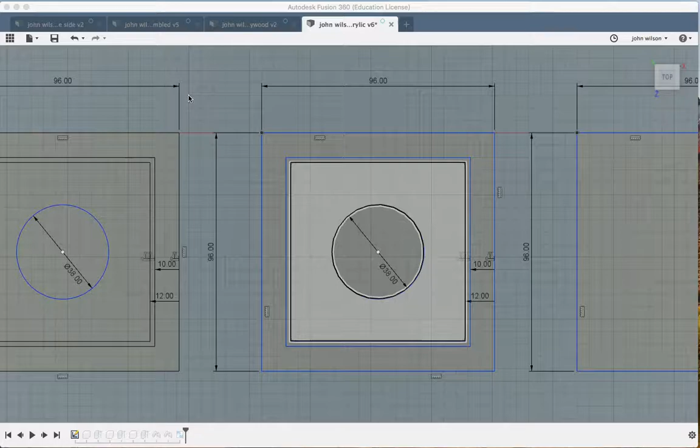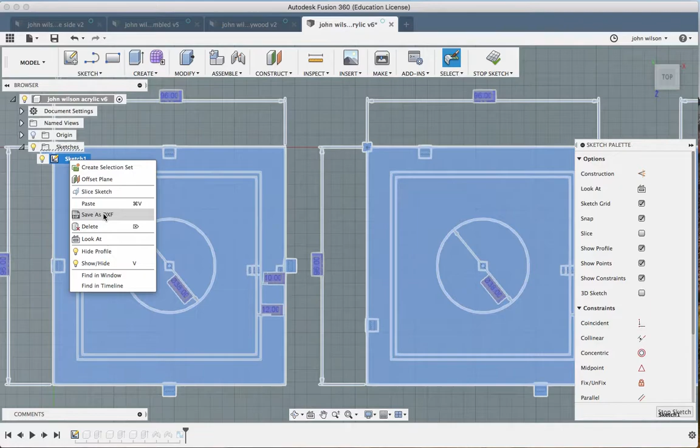Okay, so in this video, we're not going to be looking so much at how to represent your ideas, more how to draw parts for manufacturing. So in the same way as this drawing here that we created for your base, we could right-click on Sketch 1, save as a DXF, and export that to the laser cutter to cut out the acrylic pieces. We're going to do something similar for the polypropylene.

Now, the one thing that's going to be really important for you to understand or check on your drawing is what these dimensions here are. We talked earlier on and we said, well, that one was 72 and this one was also 72, I think, in this case. But obviously, it's going to vary where you've actually made your product. Yours may be larger, it may be smaller, and it may not even be square, of course.

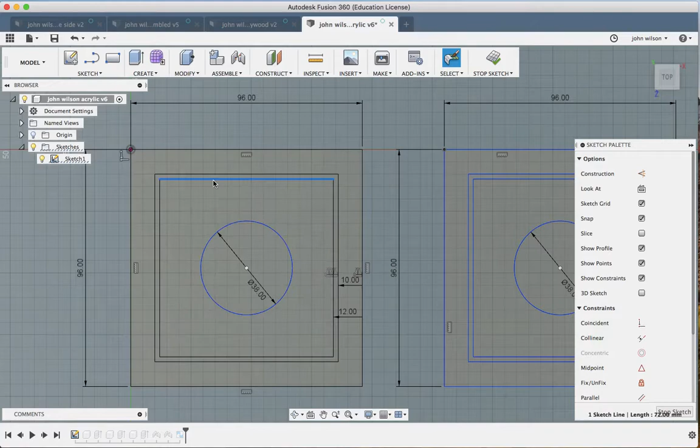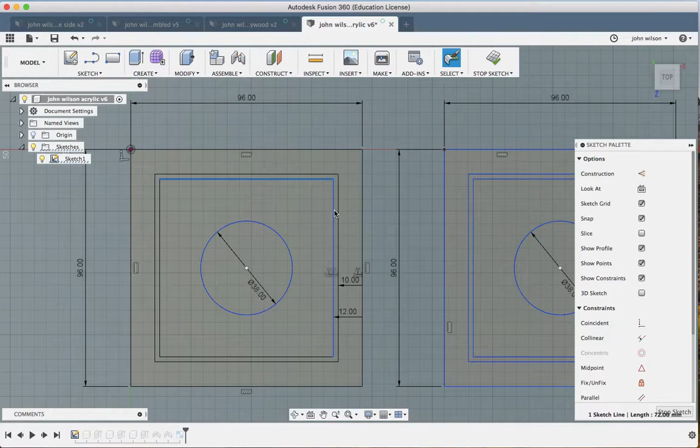You might have a measurement where this is 72 and this one is, I don't know, 82, let's say, for argument's sake. So you've got a rectangle, but you've got one side 72, 82, 72, 82. We'll use those sizes and we'll work with that as we do the next part. So let's assume it's not square. You've measured your pieces, you've measured this inside piece, and you've got 72 across here, and you've got 82 here.

Now, if that's 72, we've already said that's 76. If that's 82, that's 86. So we're going to find the midpoint between those. Well, the midpoint between 82 and 86 is 84, and the midpoint between 72 and 76 is 74. So when we go to draw our polypropylene, I'm going to do 74, then 84, then 74, then 84.

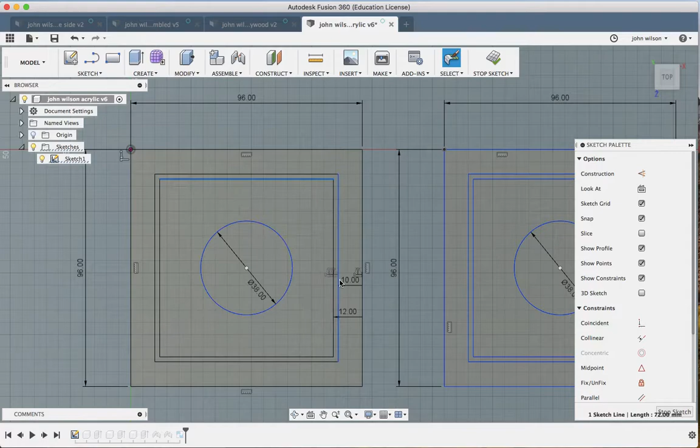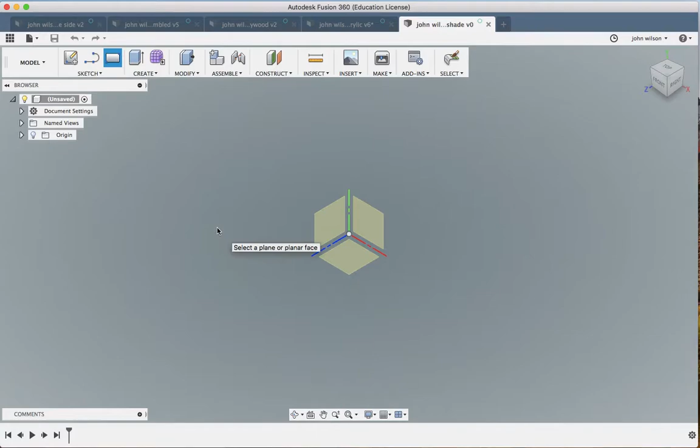Okay, so we're going to create a new drawing. We're going to come up to here and we're going to save it, and we're going to call this John Wilson polypropylene shade, and make sure we're going into a known place. Click save. So again, it's a rectangle essentially that we're starting with if it's a square shape. So I'm going to click on one of these faces. Again, I'm going to go for the plan view.

And we just said we were going to do 74 on one side and 84 on the other. So as I drag this out, this blue box is asking for the height, which is 90. Press tab, and the next blue box is asking for the width, which is going to be 74. Click 74 and boom, there we go.

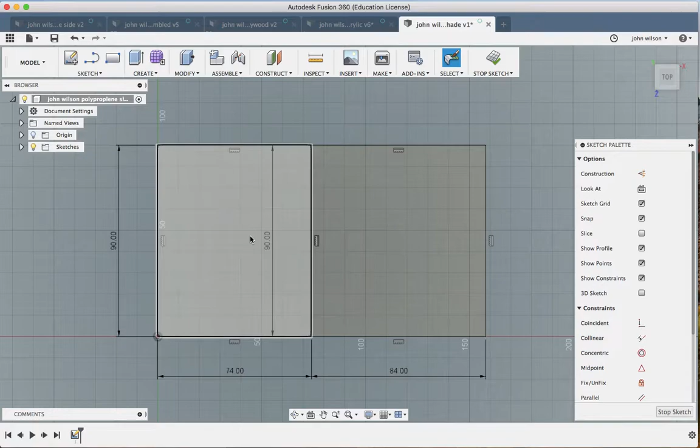When we then go to do the next piece, we're going to start with another rectangle, and this time as we pull it out, it's going to be 90, same height, they're always going to be 90 high. Tab, 84. Okay, so we said let's assume in this case it's not a square, so it's 74, 84, 74, 84 as it works its way across. So there's our first two panels.

Now, when you move on from this, obviously you've got to think about how you want it to look. So you can do a whole range of things here. I'm going to do something very, very simple. I'm going to put in a center line where I get my little green triangle showing up and pop that in there. And then I'm going to put a center line across this one as well and do that.

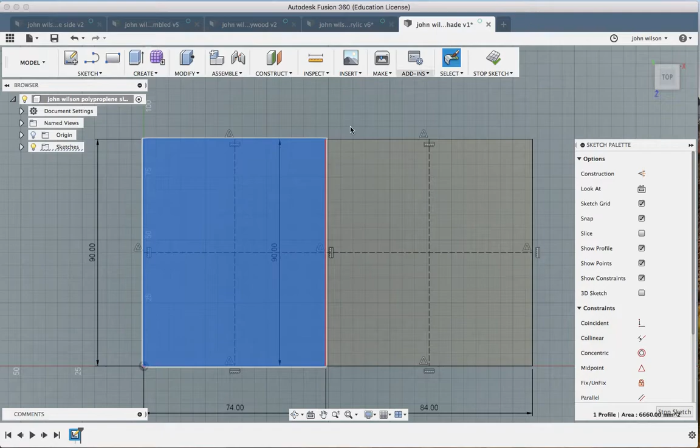In fact, I might just as well carry on my centre line across there and find my centre line down there. If you want, you can always select those lines and just press the X key on your keyboard, and they will show up as construction lines. If you think that that dimension line there is getting a bit in the way, you can select it and delete it, because it's only a repeat of that one, isn't it? 90 millimeters. So there you go. There's my pieces. I don't know why that one's gone red, but hey, that's a bit of a mystery.

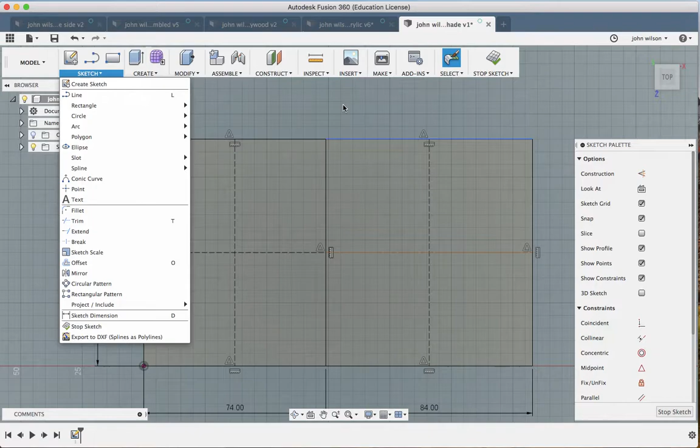Anyway, let's take a rectangle in this case. So I'm going to come to my sketch tool, and I'm going to go to the rectangle tool. Actually, I'm going to let you have a play around with these circle and rectangle patterns. So I'm going to press C for circle. I'm going to use that center point there, and something fairly small, 6 millimeters. There you go. And I'm going to do the same on that one and make that 6 millimeters.

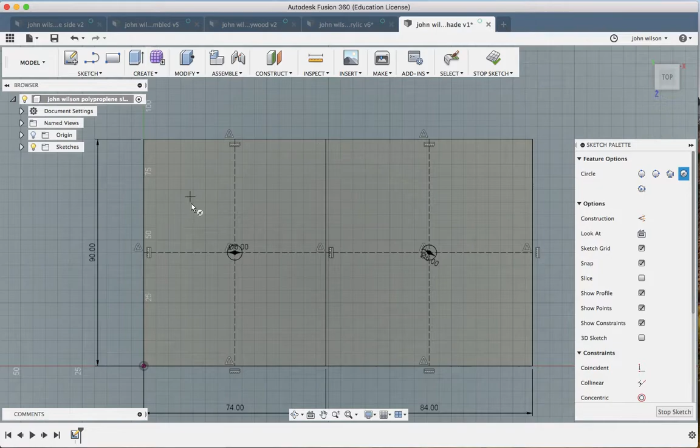There we go. What I'm then going to do is I'm going to draw that 6 millimeter circle somewhere further up on that line. Okay, so it doesn't massively matter what the position is here. I'm going to go 6 and click OK.

Now that's a point. I do ideally want it to be level with this side. So if I do a line straight across there as well and escape that, then that's just going to help me put that at the same place, 6 millimeters bump. And then you can get rid of that line. It's done its job. Okay.

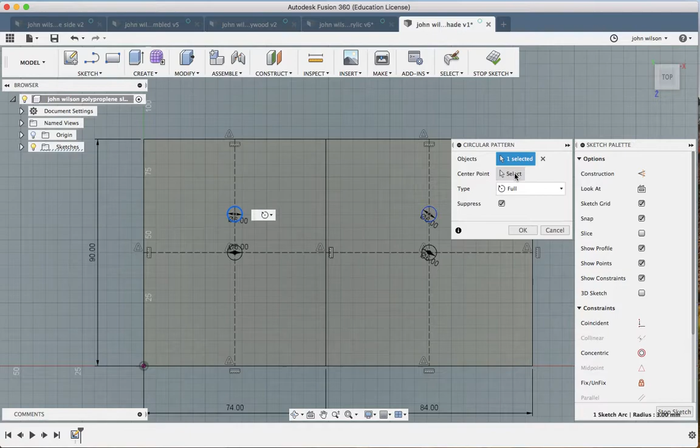So here's a center and here's a circle. And what we can do is we can do a circular pattern. First thing it asks us to do is select the object, which is going to be that one. Then it asks us to select the center point, which is going to be that one. And then it asks us how many repeats of that do we want. So I'm just going to do 8 and click OK. All right. I'm going to do the same on the other one.

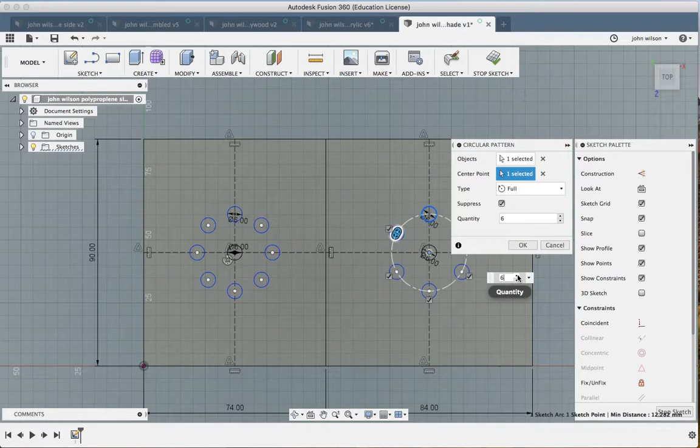Now you might be wondering, well, why can't you do them both at the same time? The reason you can't do them both at the same time is because obviously they have different centers. So that one has got to be selected for those, and then have the same number, or maybe you don't, maybe you want alternate, different numbers, 6 on one, 8 on the other, I don't know. There you go. So there's a simple pattern.

Now just think about how much material you're going to cut away here. If you cut too much, you're going to get an awful lot of light coming through it, so it's not really going to shade the candle very much. And also, the more you cut away, the weaker the material gets, of course.

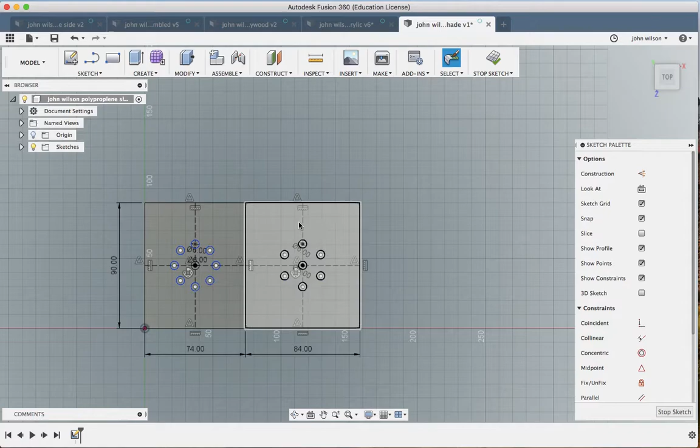So there you go. There's my short side, there's my long side, 74, 84. But of course there's 2 of each of those. So I'm going to select all of that. Sorry, let's just try and select around all of that. And then we will Command C and Command V. That hasn't selected everything, has it?

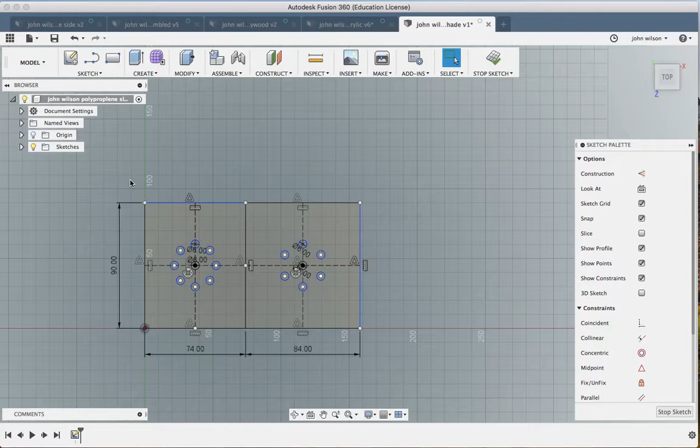Let's go to my select tool. Let's do window selection. Let's just check what we're selecting. Select priority, select tool, select filters. That's selecting everything. So it should be a window selection. Let's try again. Let's see what happens. That's a window. There you go. That's better. So let's drag all the way around that. Command C, Command V, and I'm going to slide that along that plane.

Now you'll notice that because it's snapping to the grid, it's either going not far enough or going slightly too far. It's saying that it's moved it in our dialog box here 160 millimeters, but if I add up 84 and 74, that would give me 158, which is 2 millimeters less than that. And you can see there's a tiny little gap there.

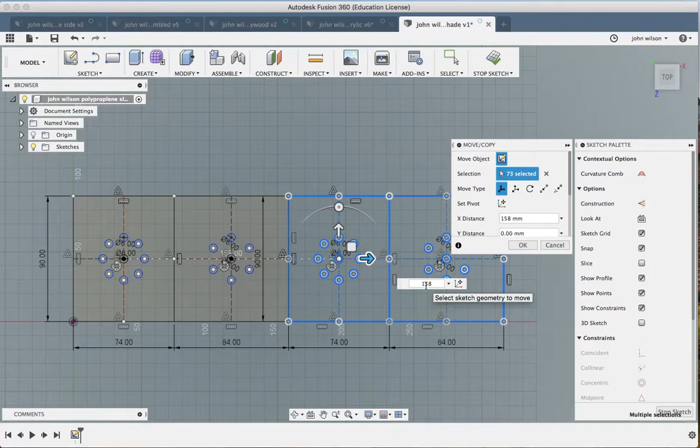So before I do anything too drastic like click OK, if I change that to 158, it should now sit directly on top of there. Now I can press enter and I've got 4 surfaces. Okay. Once you've done that, it's that line again, we'll delete that dimension line. Once you've done that, we can just do a little bit of tidying up of this.

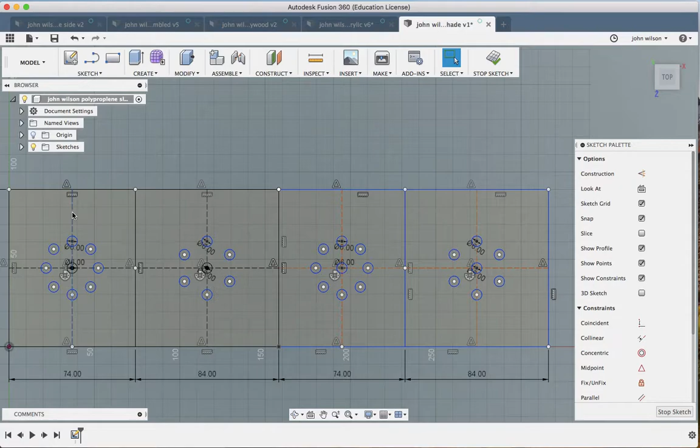Now you're going to need to add a 20 millimeter overlap on the end, or at least 15, but I think 20 is probably better. So I'm going to pull this out here and I'm going to draw a box that is 20 by 90. Okay, that's going to be where the 2 ends meet, and I need to have an actual overlap. They can't just meet as 2 corners. So there you go. That's the little flap or tab that's going to join everything back together.

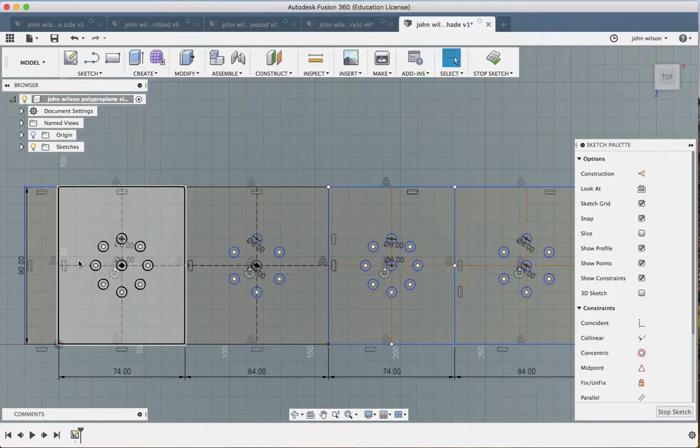Now at this point, I'm actually going to use my T tool, T for trim. But before we do that, let's delete these center lines. We'll just select them and delete them, select and delete. Tidy everything up a little bit, select and delete, select and delete. And what we're then going to do is we're going to use our trim tool to, if you like, separate parts of our drawing.

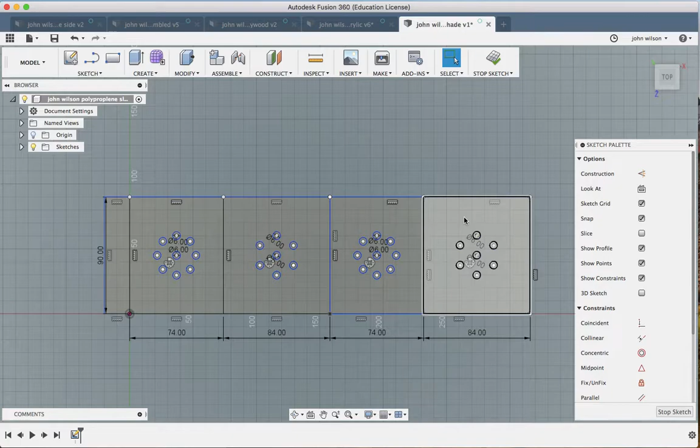At the moment on, for example, this panel here, this is made up of one boundary. This is made up of another boundary. This is made up, okay? So we want to break those boundaries up so the laser cutter can handle everything. So I'm going to press T for trim and trim away those lines there. Now you'll notice I'm having to do it twice.

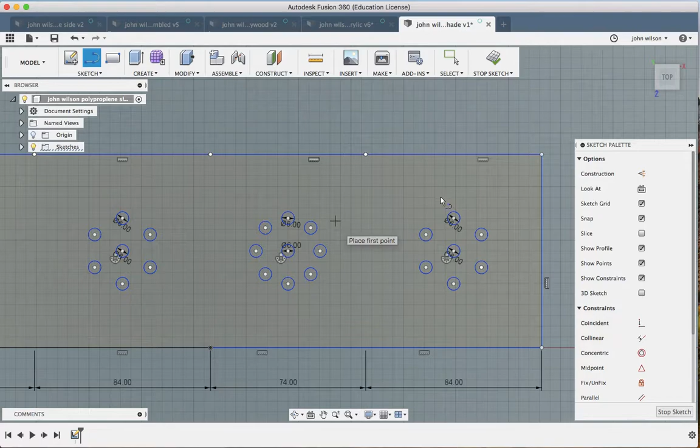The reason I'm having to do it twice is because where we've overlapped those lines, there is effectively the left-hand side of one rectangle and the right-hand side of another. Now, having done that, we're now in a place to redraw those lines, which seems a bit odd. Why delete them just to redraw them? Well, because we want them to be drawn as separate entities, not as part of that bigger square.

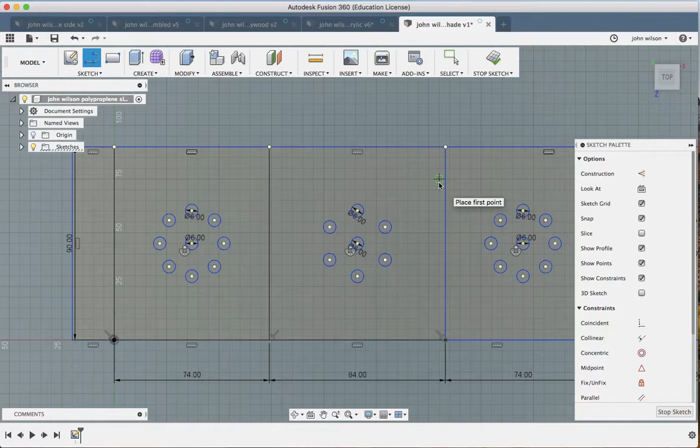So you can use the points that were already in there from last time and just make sure it's snapping to that point. Draw your lines in there. And the final thing is you're going to need to put some circles in the end. The circles want to be 3.5 millimeters in diameter, and the position of them needs to be the same on both ends.

If we take our circle tool and let's zoom in and have a look up here. So, oops, that's a bit too zoomed in. So if I use my circle tool, I can see that that is in the center of my 20 millimeter piece here. So I'm going to come up there and into there. So what am I? 15 millimeters up. I know that because the sizes of those grid squares are all 5.

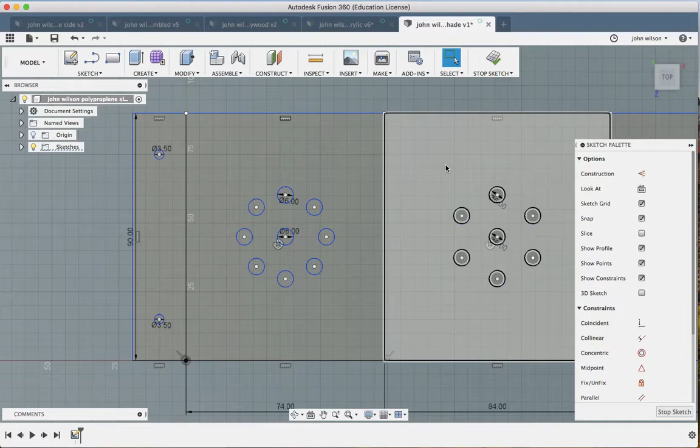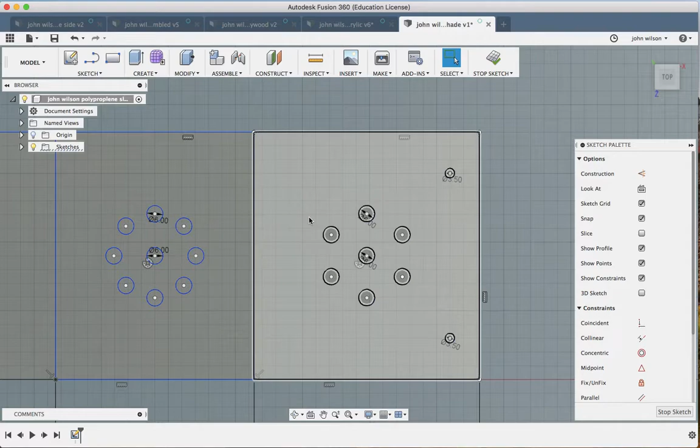And I'm going to put in a size of 3.5 millimeters. I'm going to come down 1, 2, 3, and I'm going to do the same there, 3.5 millimeters. Okay. Then I'm going to come across to the opposite end, and I'm going to do the same again. I'm going to press my circle tool, and I'm going to come up 3.5 millimeters. Okay, press enter, and on the same line, 1, 2, 3 grid squares, so 15 millimeters, 3.5, enter, enter. Now, the only thing I haven't checked is are the holes in the same positions both ends.

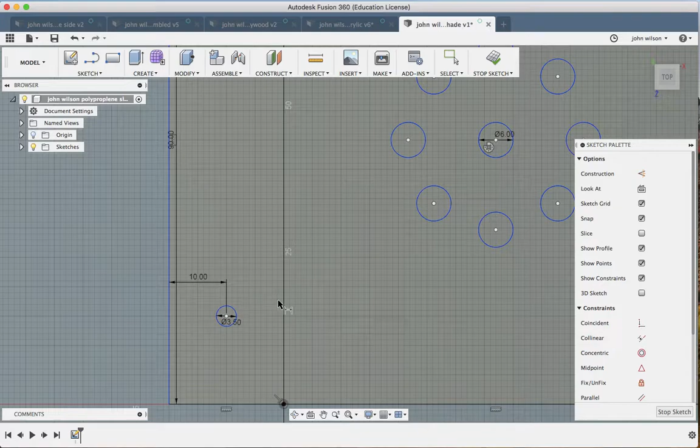If I zoom in down here, press my D tool, I should be able to click that and click on that edge, and it will tell me I'm 10 millimeters in that direction. Okay. It should also tell me that I'm 10 millimeters from there to there, because the whole thing was 20 millimeters wide. So I just want to scoot across to the far side, and before I cut this out, be absolutely certain that these are also 10 millimeters from the end.

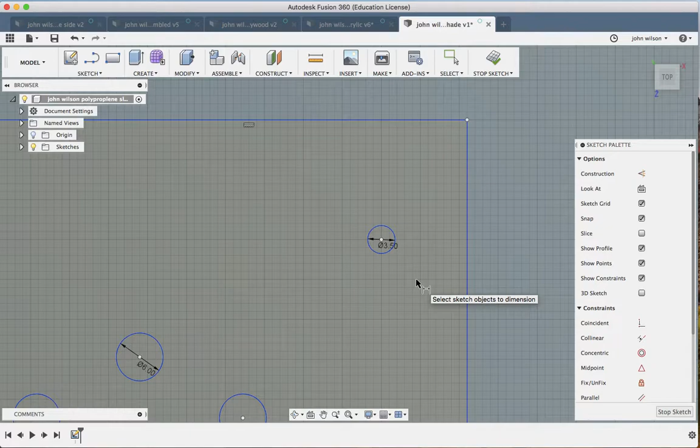Okay. Now this 10 millimeter measurement, there you go, that's actually 11. So that's not going to work. I need to type that into 10 and press enter, enter, there you go. It's only going to be 10 millimeters if you've made the tab at the far end 20, and put your pieces at the other end in the center of that 10 millimeters, just move that along. And there you go. That then should be your polypropylene piece ready for cutting.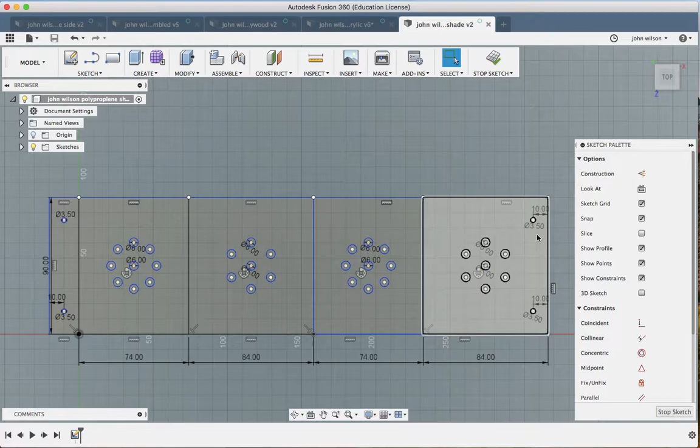The last thing to do, obviously just click save, yep, here. And the last thing is to change it into the file format that the laser cutter understands. You don't need to worry about deleting any of these bits, okay. The dimensions don't form part of your drawing. Do just be careful with this. Obviously what you don't want is those holes to connect up with those holes. This flap here is going to end up sitting to the right hand side of that. So when you're drawing these cutouts here, don't make them too close to the edges. I would keep them a good 20 millimeters away.

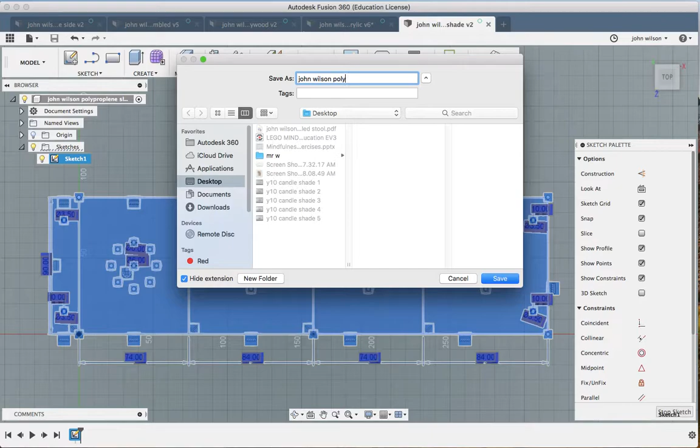Anyway, onto your sketches. If you click your little button there, right click, save as DXF, and this one we're going to call John Wilson polypropylene for cutting in white. Okay, make sure you know you're saving it onto your desktop or wherever it happens to be. That can then be emailed to me and we'll cut it out on the laser cutter for you. Okay, and that should be that.